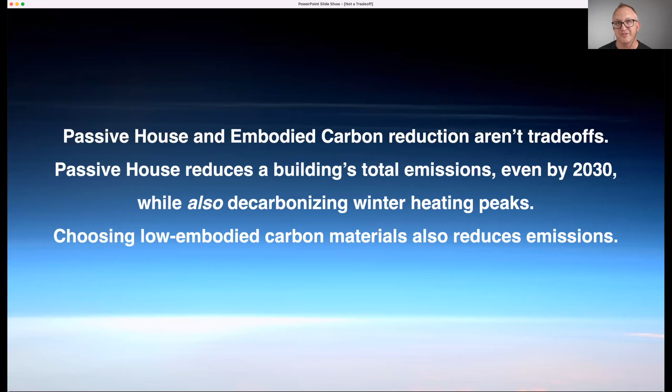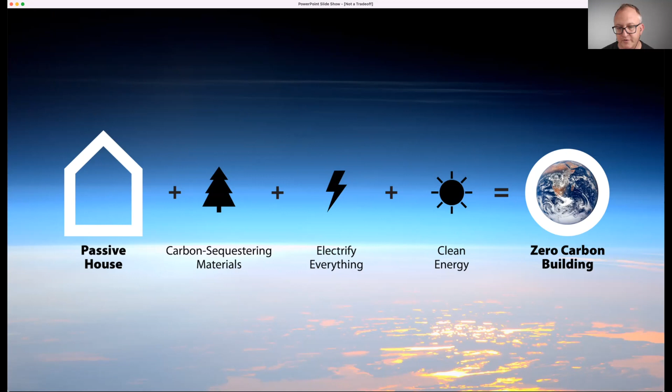We're also finding some climate progress, maybe even some accelerating progress in the United States. The Inflation Reduction Act surprisingly passed, and three separate modeling groups see that as bringing us 80% of the way toward our 2030 target of decarbonization in the United States, which is striking distance to doing our part toward a 1.5 degrees Celsius warming future. But that is not going to be easy.

In fact, this task in the United States will require us from now to 2050 to double the amount of electricity generation happening in 2050 as it is happening now, all while subtracting all the fossil fuel generation from that energy grid. So there will be NIMBYism that will try to slow it down. There's going to be permitting problems, and we need to address that. And this is going to be tough. And so we want to make that as easy as possible.

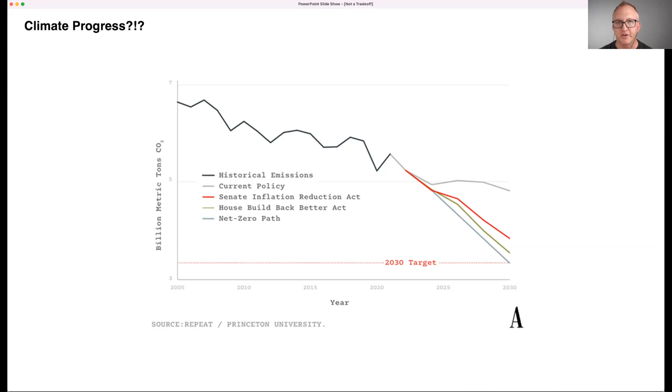In the perfect world, we would see totally nice and flat loads on the electricity grid, not fluctuating during the year. Because when we see a peak in load, that means we have to overbuild the generating capacity in order to meet that. And that makes the task even harder. And we know that buildings play a critically important role in

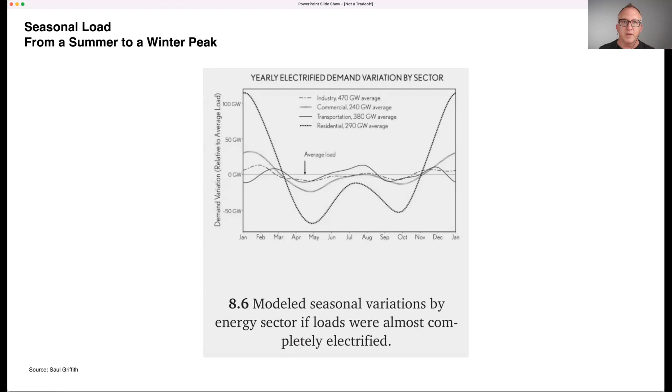all of this, because as you can see, that crazy line there, this is from Saul Griffith, and what he's looking at is electricity use in the US now, and what would happen if everything were electrified. So if we electrified all of the natural gas burning and oil burning that is happening in buildings, we would have these huge spikes in electricity use during the wintertime. Of course, that's because of heating demand. So in Passive House, of course, we know how to address that.

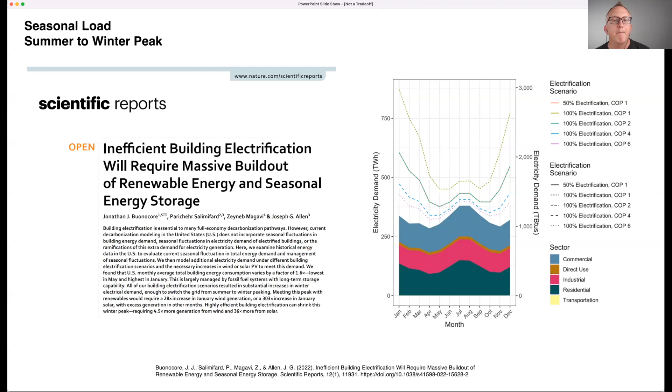This issue is becoming more and more front of mind and discussed in academic circles and beyond. And this is a paper that came from Nature magazine this year. It says inefficient building electrification will require massive build out of renewable energy and seasonal energy storage. And in it, they say, we found that US monthly average total building energy consumption varies by a factor of 1.6 times. So lowest in May and highest in January, so winter peak.

This is largely managed by fossil fuel systems with long-term storage capability. Meeting this peak with renewables, which is our project, would require a 28 times increase in January wind generation, or a 303 times increase in January solar, with excess generation in other months.

Highly efficient building electrification can shrink this winter peak, requiring just 4.5 times more generation from wind and 36 times more from solar. Those are still big numbers, but we're talking about a roughly order of magnitude smaller task if we are serious about building energy efficiency.

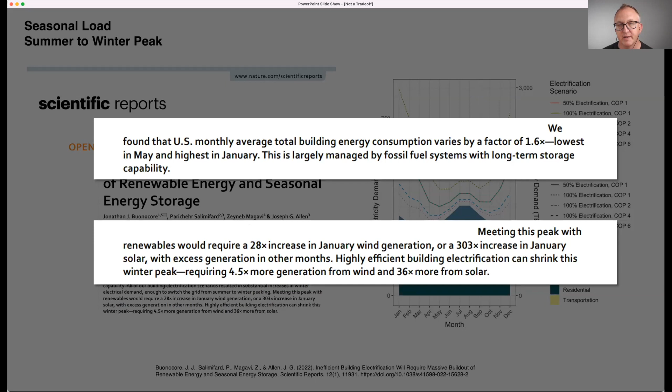So they go on and show this curve, which is now known as the falcon curve because it looks like the wing of a falcon as it's flying toward you. And what we're looking at on that green blob on the bottom is existing electricity demand from the residential sector. Then we see industrial, direct use, and commercial. Those are the blobs of color.

And then the lines show different scenarios of electrification and building energy efficiency. This is simplified in this study to look at the efficiency of the heating systems in these buildings. So that's why you're seeing the COP, the coefficient of performance of the heating. And it ranges from that really scary, the wings straight up, of if we were to electrify all the heating and heat with direct resistance heating, which is a COP of 1. And that shows massive peaks that would be very difficult to meet with clean energy.

That beautiful dotted purple line that you see, or magenta line that's at the bottom, is what would happen at a COP of 6, which is practically not possible right now with heat pumps, but a COP of 3 is. And if you combine the COP of 3 heat pump with passive house, then you can get to that much flatter, clean energy grid friendly reality. And that's what we want to do.

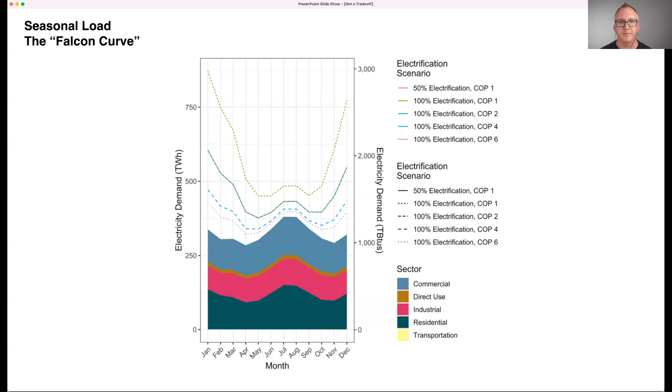But what about embodied carbon? So I want to outline 3 key common assumptions about embodied carbon and building decarbonization, and you'll see the numbers push back on that when Skylar presents. So first, the common assumption is that building energy efficiency means higher embodied carbon and often higher overall emissions. And the notion is that something like passive house, as Dan was mentioning, could be counterproductive. So that's the first assumption.

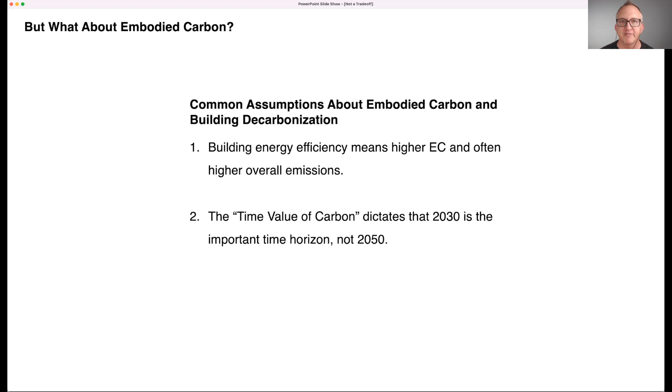The second is that the time value of carbon dictates that 2030 is the important time horizon, not 2050. And this notion of the time value of carbon is a really important one. And that is that we want to avoid short-term big carbon emissions burps now, because if we emit a bunch of carbon now early on, it has a long time during 2030 and all these really important decades during this time of climate crisis this century to make the problem worse. So we want to avoid those burps of upfront carbon, and so it's an important concept.

Third is this notion that if my utility's electricity is near zero emissions, then building energy use isn't that important anyway, right? Because if my utility's electricity is near zero emissions, I'm getting clean electrons, and if there's no carbon in those electrons, then who cares if I burn them or use them? Okay, so let's take these one by one.

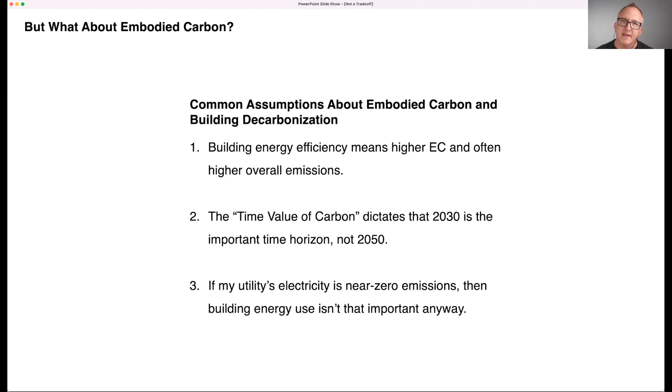First, we rightly, as a community, are addressing that first one by looking for low embodied carbon and carbon sequestering materials that can support our highly energy efficient building designs. That is an important and smart thing to do. But we can take a step further and ask the question, when you're assuming that energy efficiency means higher embodied carbon, are you accounting for the smaller embodied carbon and the smaller refrigerant leaks from the smaller systems in a low load building? And if you aren't, you need to, because this is a vitally critical question, and you're going to see a lot about that, I think, in Skylar's work.

Okay, so then the time value of carbon is an important concept. Let's also acknowledge that moving the horizon up from 2050 to 2030 also is something of an accounting trick, right? Because it elevates the importance of embodied carbon and discounts the ongoing importance of operational carbon emissions. So while there's truth in the time value of carbon, let's be honest that there is a bit of an accounting trick going on here.

But even more importantly, we need to also look at the time value of efficiency. And that is the reality that, yes, we are part of it. We're in the early stages of a clean energy transition, but we're far from there yet. And regardless of point number 3, the reality is that even in a city like Seattle, we're getting dirty electrons. We have carbon rich electricity right now. And that'll change over time, and we'll get to a place where we're near carbon-free electricity, but we're not there yet.

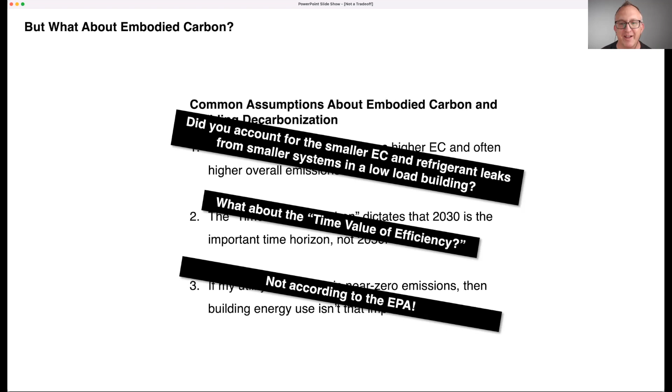I'm just going to dive in and start discussing the operational and embodied carbon emissions estimator tool that I developed to address this very problem that Zach presented. This is a screen showing this tool, and really what I've done with this tool is, I'm sure as any other Passive House consultant can relate to, over the years with different projects I've consulted on, I've developed like 20 different spreadsheets that have a calculation for embodied emissions and different graphs and different outputs. And my goal was to bring this all together into one tool.

And just to show the importance of it, to lead off where Zach left off, the very first input in this tool is the emission factor. And I'm going to spend some time after I quickly go through some of the inputs in this tool, really diving into the emission factors and where they come from and what to be cautious for, and how to maybe spot how some other practitioners may be misapplying emission factors to discount energy efficiency and the operational emissions reductions.

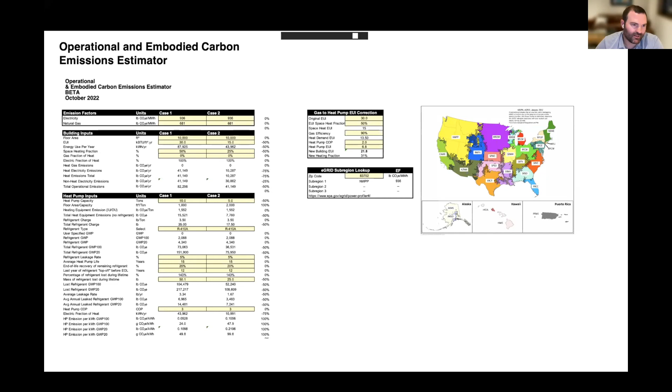So in this tool, you can compare two cases, and with zip code, you can look up your eGRID subregion that you're located in, which I'll get into a little more here. And then you can put the area of the building, the EUI input. You can compare an electric building with a gas building, and you can compare different heat pump capacities, different refrigerant types, different leakage rates, different time frames for how long the equipment will last, if the equipment is actually topped off with refrigerant, if there's an assumed leak, and look at different COP impacts.

We also are able to input if the project has PV. You can look at the embodied emissions of the PV system, the embodied emissions of the battery system, if you have some storage on site. And then also one part of the tool that's really cool is a lot of this tool actually was inspired by the amazing BEAM estimator tool.

And what I wanted was just to have a single tool where I could have operational energy in the tool, and then also be able to compare a building with triple pane windows versus double pane windows, or with different insulation types. So this is like a mini BEAM calculator that uses all the insulation types in BEAM right here, for easy comparison. And then you can also take outputs from other third-party tools and use those in some of the visualizations that are generated in the tool.

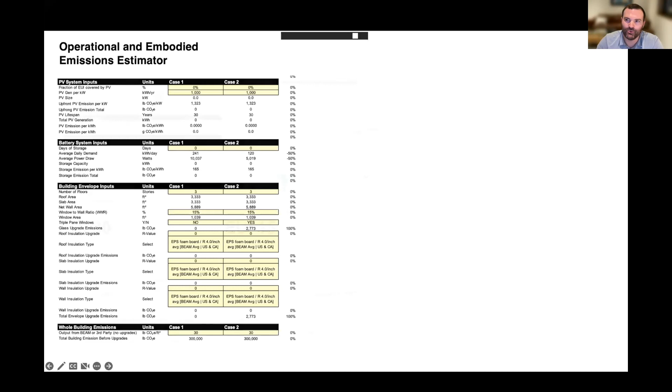Here's an example showing some different outputs where not only are the upfront emissions for the structure put in place, for example, from the beam tool in this light gray, you can also compare the leakage rates based on the HVAC system, the PV systems, and also enclosure upgrades. If you want to look right in this tool and kind of see, hey, if I wrap this building in mineral wool, or if I did cellulose, how would that impact my two cases?

And then the part of the tool which I spent the most time kind of grasping was incorporating future emission scenarios into the projections for the accumulated operating emissions of the building. So you can actually look at two cases across a range of future decarbonization scenarios and really see how the building will perform, not only with retrospective emissions of what emissions were yesterday for the grid and today for the grid, but how the building may perform long-term with different emission factors and how that impacts the long-term emissions of the building.

The graph also plots out refrigerant emissions and the embodied carbon as well, just for a visualization. And all this is additive. And unfortunately, we're not going to have enough time for me to dive into the tool during this presentation. But during the Q&A, I'm going to actually get into the tool, and hopefully I can answer some of your questions that arise, or some what-if scenarios about, hey, what if we wrap this building in X insulation type? How does that impact the upfront emissions of the building?

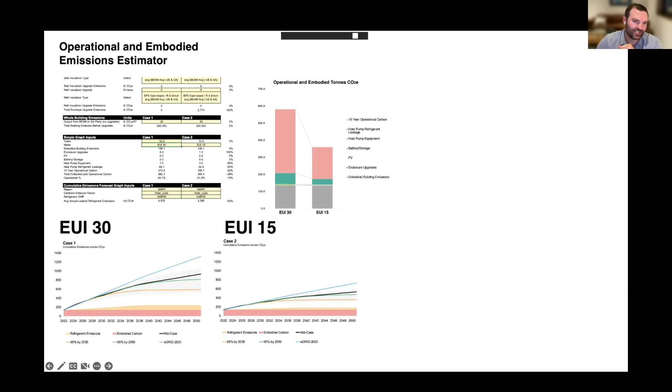Now, diving away from the tool itself, I want to get into really where I dove deep in some of the assumptions for the tool, and that's with respect to the operational emissions and the emissions factors. And that's why I really thought it was important to incorporate the best practice emission factors in this tool. One of the biggest issues I see my peers doing that present operational emissions data is really using the wrong geographic boundary for their emissions calculations.

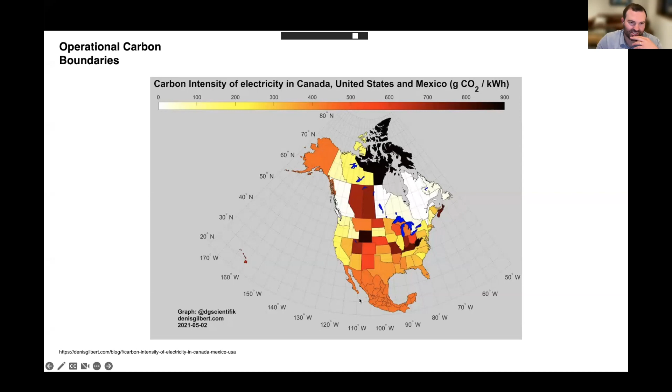And really the biggest issue is when you use too small of a region, it can neglect imports and exports, but it also will ignore the interdependencies of supply and demand in larger geographic regions beyond utility and state boundaries. So this map here was presented by Graham Finch in a recent presentation, and you can clearly see there's distinct boundaries of the emissions, but in reality, the grid extends beyond these political or geographic boundaries, and we need to look at the bigger picture of the grid.

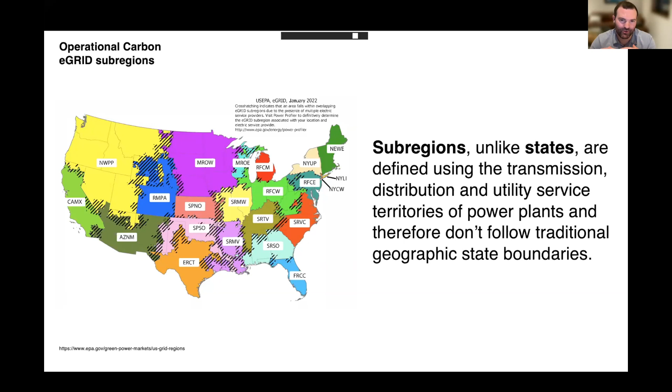But if you look into the documentation for eGRID, and the documentation from other entities that do emission factor calculations, like Zach mentioned, the Union of Concerned Scientists, DOE, NREL, all these different entities, they really encourage using the subregion, because subregions, unlike states, are defined by the transmission, distribution, and utility service territory of power plants, and therefore don't follow traditional geographic state boundaries.

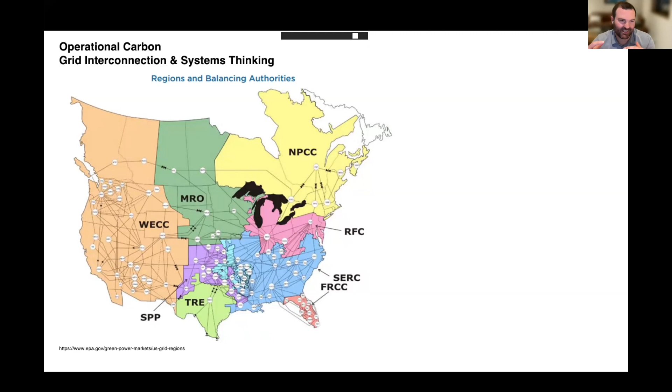In the WECC alone, there's over 130,000 miles of interconnected transmission line. And the grid works like a single large machine that's highly interconnected, interconnecting distant areas with these transmission lines. And the electric current on these transmission lines is transmitted at the speed of light as physics dictates, and it doesn't obey political boundaries.

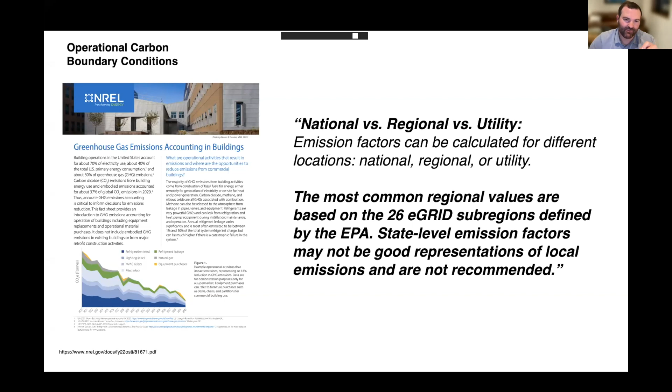NREL recently released some documentation on greenhouse gas emissions accounting in buildings. They say the most common regional values are based on the 26 eGrid subregions defined by the EPA. State level emission factors may not be a good representation of local emissions and are not recommended. So if I were trying to do a calculation for operational emissions for a project in Washington State, I may just go to the eGrid online tool and pull up this emission factor of 200 pounds per megawatt hour.

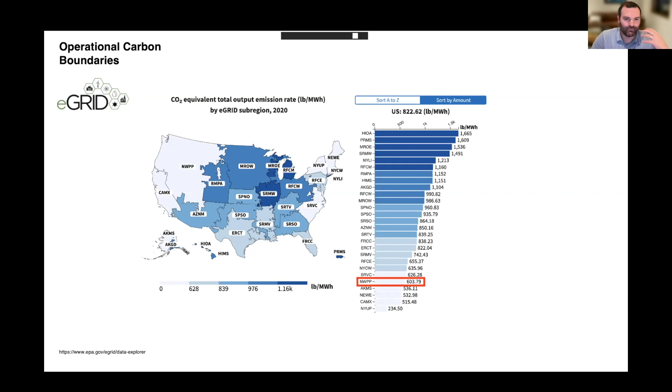But if I were to zoom out and look at the whole Northwest Power Pool region, I would see that the emission rate is actually 3 times the state rate. And this is a more accurate description of the regional mix. And so it's 3 times that 200 pound rate. And then also in the WECC, for reference, which is a larger region, it increases to about 700 pounds.

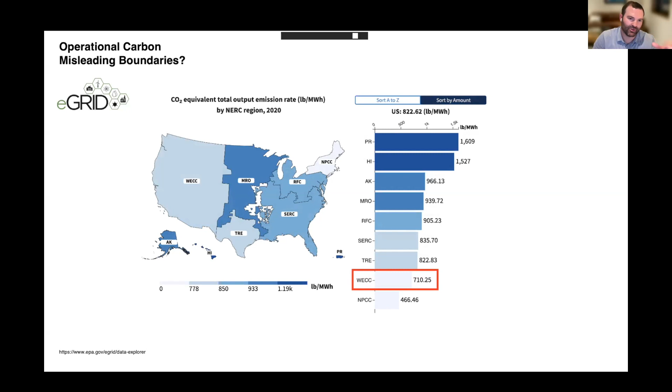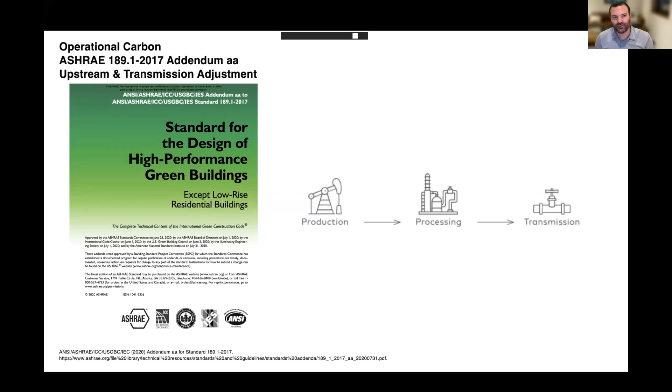And so even if you get the region right and you use the NWPP, one thing that these values are ignoring, which are important to consider, is upstream emissions and also transmission losses. And so I've seen people use the right regional number instead of using a state or utility, but then they aren't accounting for any of the upstream emissions related to that energy use.

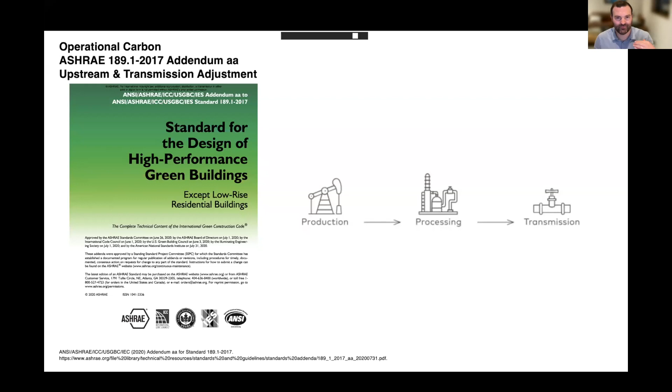But luckily, ASHRAE 189 has specifically calculated emissions factors for each region based on the mix of fossil fuels in that region, and they've provided corrected values. These are the same values that are also listed in the IgCC 2021. So if you reference that document, you can see that the NWPP, when you account for upstream emissions, whether that's methane leakage or extraction of coal or transport of coal, it bumps the value from 600 to 936 pounds per megawatt hour.

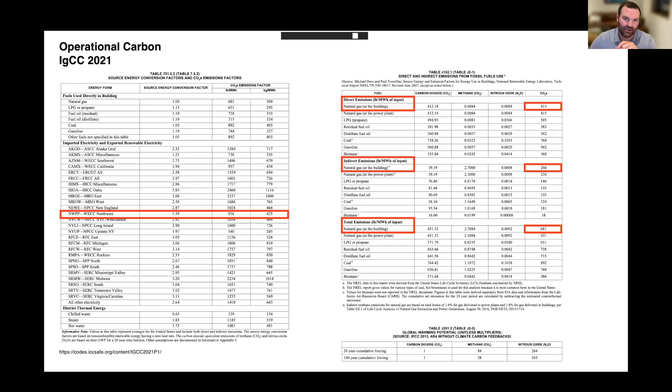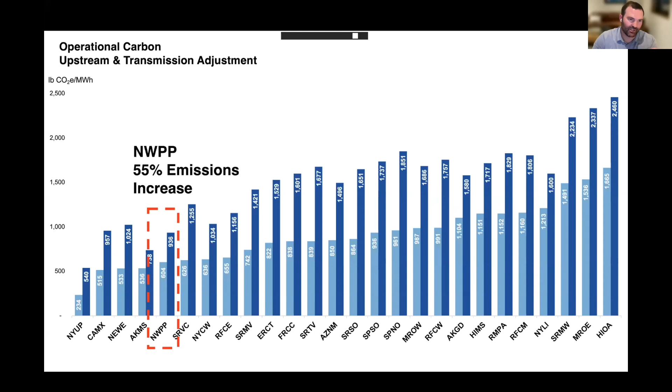And I'm just going to make a quick note because we're short on time, but the emissions factors often used for natural gas are adjusted in here as well to account for leakage. The upstream adjustments for natural gas equate to about 40% more emissions for natural gas combustion than you would typically see calculated if you just use the combustion on site. And this is just to visualize. The dark blue lines are the corrected emission factors for upstream leakage, and the lighter blue is the eGrid value, and there's about a 55% emissions increase.

So if you were doing a calculation for your project, you could have a really large range of results. If you use Seattle pixie dust, fairy values of 0, there's no point of efficiency from an operational emission saving perspective. Or you could use the eGrid values for Washington State, or you could use the more accurate values that account for the upstream emissions. And so you could be off by a factor of 4 or 5.

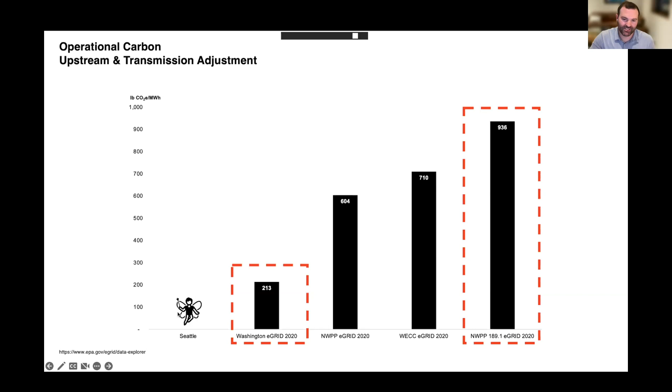So just be really cautious when you're using emissions factors and really dig into some of the assumptions people are using, because unfortunately, in a lot of cases that I've seen, they're using really ultra low cherry picked values for places that aren't really representative of the regional grid.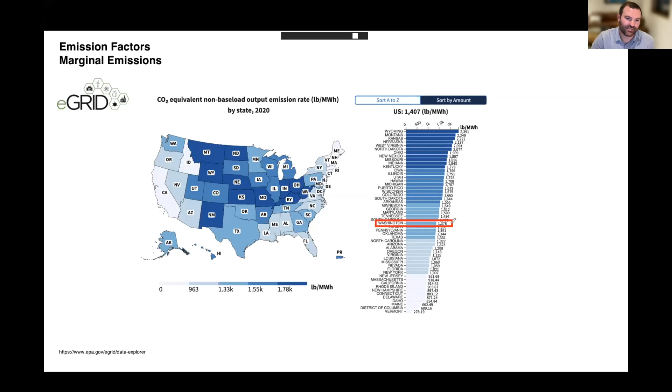And so if you want to get context for that, you can look here for Washington State. The eGRID publishes a non-baseload output emission rate for Washington of nearly 1,400 pounds per megawatt hour. And so that's like under peak load conditions, what you'd expect kind of the emission rate to be, which is almost 7 times higher than their standard emission rate. And this is just to give you context.

And I'm just going to say, I do not use short-term emission rates in calculations. I would also be very skeptical of any calculations that use them, because oftentimes they're used by kind of bad actors that are trying to argue against electrification and trying to say that electrical emissions are so high, we should continue with internal combustion engines and we shouldn't use EVs.

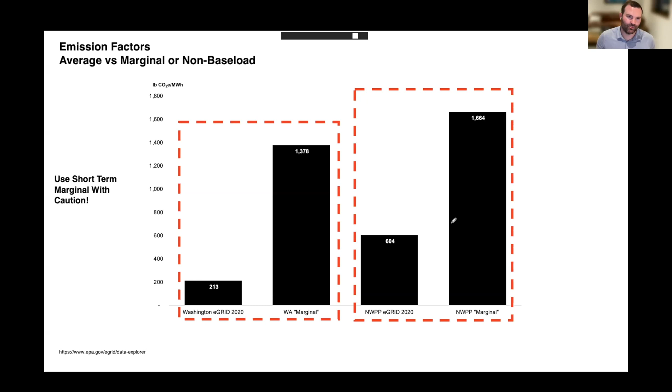But in reality, as we decarbonize the grid, that marginal emission will come down as we add new generation to the mix. And that's where the real beauty and really the gold standard of emissions are what are called forward-looking or long-run emission rates. So these are marginal emission rates, but they account for how the grid is impacted by not only electrical load growth, but also decarbonization of the grid. So it looks at current policies and future policies and cost of electricity and how the grid is going to transform. And you can actually get a range of scenarios, similar to how you would see with a climate model where there'd be a range of outcomes.

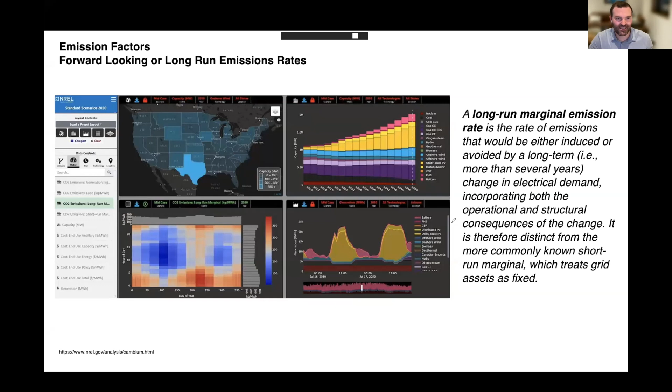The NREL Cambium tool is able to produce these long-run marginal emissions that you can use to assess your building on a longer time frame out to 2050. And then just to hammer home, I took a screenshot of this earlier today, and I just want to zoom in here on BC exporting about 330 megawatts to Alberta, and that if BC had a policy where they increased electrification, they were no longer able to export that hydroelectricity to Alberta, then you no longer would be offsetting this 450 gram carbon intensity electricity anymore.

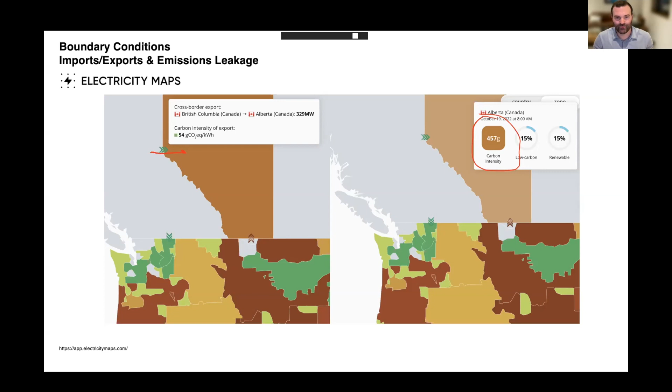So things that happen in one region have an impact on another region and the emissions in another region. And we have to think in systems, and that's how Passive House consultants are trained, is to think of the building as a system and to think of these things in a broader sense.

Hey, Zach, how are we doing on time? Could I take another 5 minutes? Yeah, go, Skylar. Don't stop.

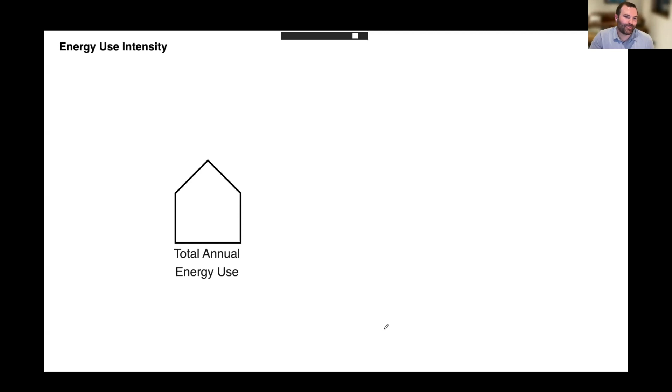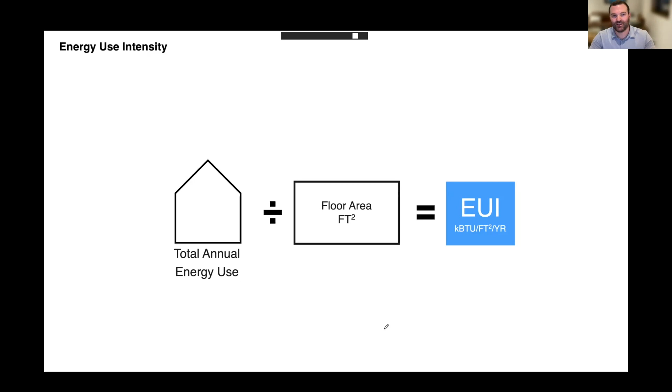Okay. So basically, I'm just going to go through how the tool is structured with some examples before we actually dive into the tool. But basically, the foundation of the tool is to understand what the building EUI is. And so you can get that from the PHPP or a WUFI model. And basically, it's the total energy use divided by the floor area in kBTU per square foot per year. Sorry for those that are on SI. I'm going to be mostly in inch pound here.

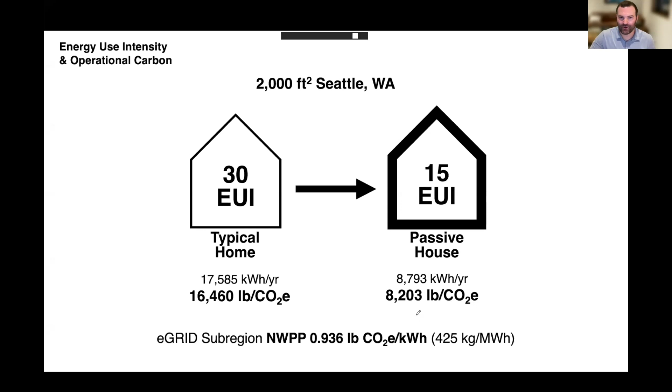But this just shows, even in Seattle, which is in the NWPP, where you have about a pound of CO2 equivalent emissions per kilowatt hour, cutting the EUI from 30 to 15, and I've seen single family passive house projects with EUIs less than 10, but I'm just using this as an example, you can easily cut 8,000 pounds of CO2 emissions per year. So this is one of the cleanest regions in North America. To say that there's not opportunity for efficiency to reduce carbon is really misleading and not really informative.

And beyond that, a lot of analyses completely ignore the HVAC reduction that comes with a passive house. So if you model the project, a 2,000 square foot house with kind of a code enclosure, you could expect anywhere from like a 3 to 5 ton heat pump that would be required. Whereas my passive house in Boise, Idaho, for example, which has a design temperature in the single digits in Fahrenheit, has a 1 ton heat pump is all it has.

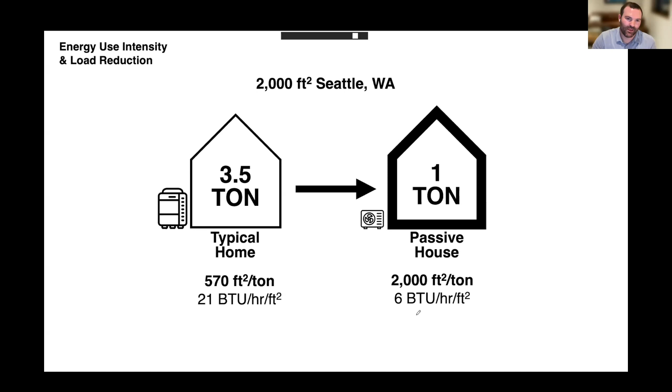So that load reduction has a big impact, not only on the equipment itself. So the equipment being almost 3 times smaller can have a third of the upfront emissions just by the equipment being smaller, but more importantly is on the refrigerant side, especially with standard air-to-air heat pumps that we're seeing on a lot of projects still.

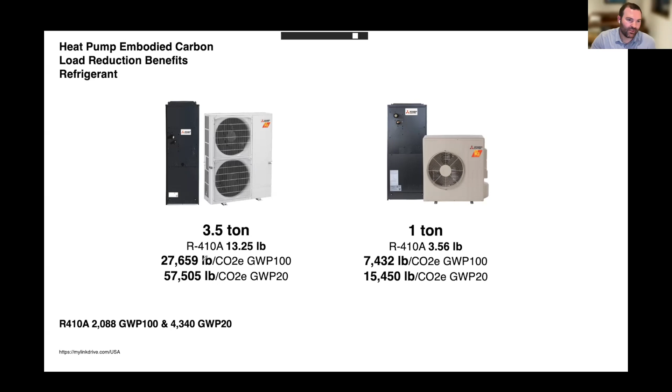And I know we're pushing to move away from R410A, but this is pretty standard on single family and smaller multifamily projects, and multifamily projects with VRF is a lot of 410A. And the emissions from just 13 pounds of R410A on a project is just a massive difference, like 30,000 pounds of emissions potentially if that refrigerant were to leak versus 7,500 pounds with the smaller system.

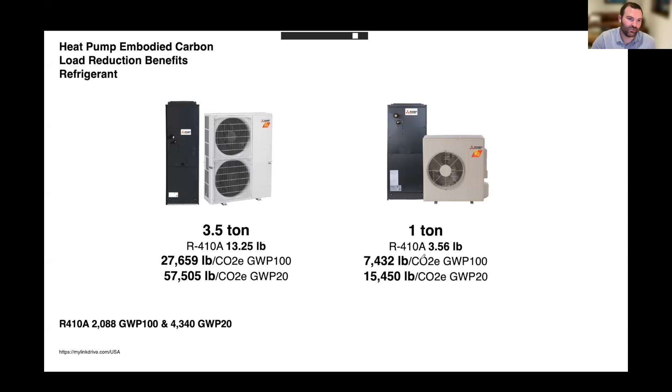So the smaller equipment sizing, it can't be understated how important that is, especially with high GWP refrigerant. And in the calculator, you can select different types of refrigerant to see the impact and the benefits of that. And I know many of us are working to use lower GWP refrigerant, but this is just for an example.

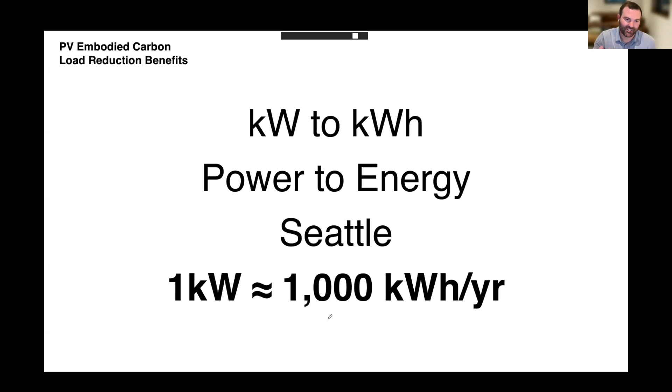Another piece that I often see ignored in the conversation of upfront emissions is the size of the PV system. For the tool, all you need to know is what 1 kW produces. So if you install 1,000 watts of PV on the roof, you just need to go into PVWatts and put a 1 kW system in, and it'll tell you based on your roof pitch about how much electricity that system will generate over the course of the year. In Seattle, I'm just going to use 1,000 kilowatt hours per kW because it just makes the math easier.

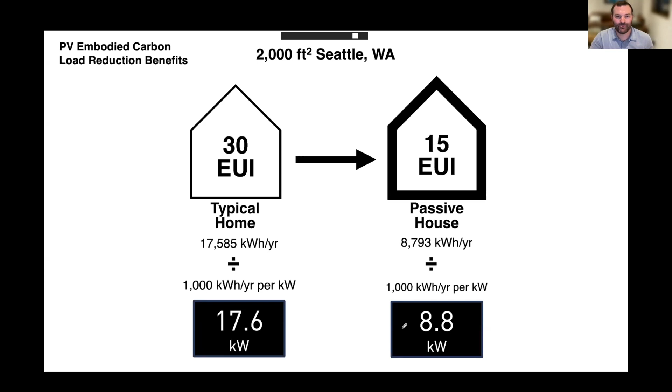So if you have a project with an EUI of 30 and you have a project with an EUI of 15, the PV system goes from 17.6 kW to 8.8 kW if you are trying to offset all your electricity use on site. And if we assume 615 kilograms of CO2 per kW, that's about a 10,000 pound emission difference in the PV system alone.

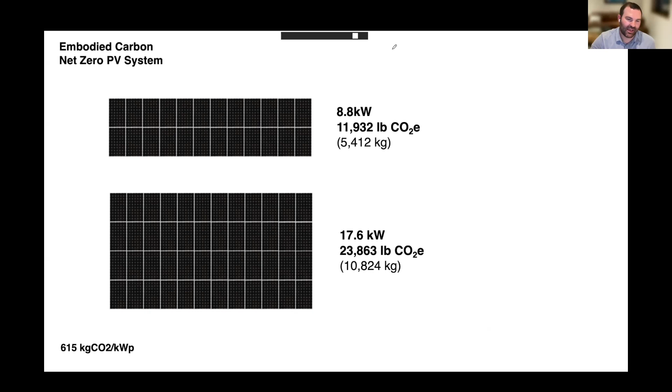But I just want to be really clear: on my projects, even if we do an ultra efficient passive house and we have extra roof area, we try to max out the PV. Because if you take that 1 kW of PV, it's really important to keep this in context, because when you're looking at the upfront emissions for a project, the PV may look like a lot of carbon, but it's producing a lot of electricity.

And when you take that 615 kilograms and you divide it by the 20,000 kilowatt hours of production that you may get from your system over 20 years, that electricity comes out to very low carbon, 31 grams of CO2 equivalent per kilowatt hour. And compare that to the Northwest Power Pool, which is one of the cleanest in the region. And this is the average emission, it's not even a marginal emission rate, and it's 425.

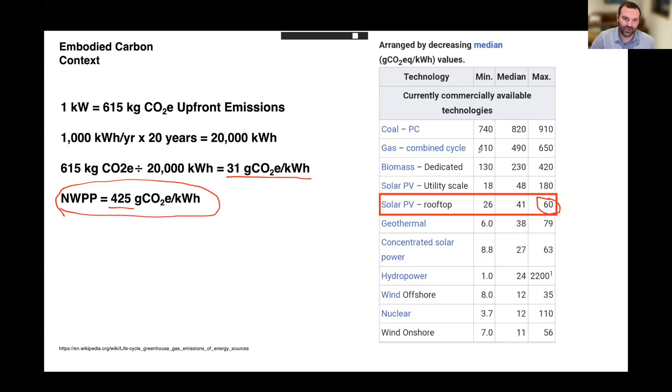And then basically, I think we're going to hop to the Q&A, and then I'm going to dive into the tool, and I can answer some of your questions with that tool to do some what-ifs and scenarios, and I can show basically what building emissions are looking like versus operational emissions on different time horizons, and give you some context.